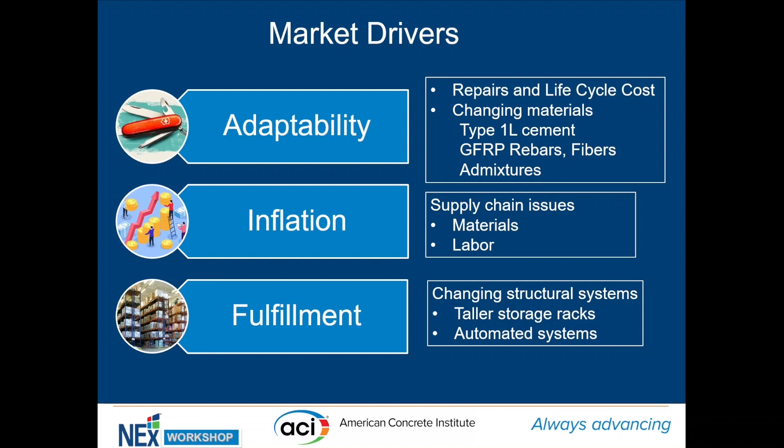Geotechnical concerns - we've got soils that will sometimes heave. Just all sorts of things happening right now. All right, let's take a breath. Think about what ACI 360 has to offer.

It's mainly 4 types of slabs that we address. Think of a plain vanilla 6-inch thick slab, no reinforcement, saw cut joints. It's generally going to be happy until we start putting loads across the joints. It's hard to break a slab except at the joints, at least in my experience.

Another one talked about in ACI 360 is slabs that are lightly reinforced, call it 0.1%. We talk about that in the document, but we don't talk about it enough - there's going to be a whole new chapter on that coming up. Another way to approach it is to extend the joints to where we call it a jointless floor slab.

And really load that one up with about 0.5% steel or more, that's a lot of rebar, very costly.

A third way to approach it is to take a more proactive approach. I think shrinkage compensating concrete has come a long way, it's really viable these days, a great option to be proposing to actively try to control shrinkage. Post-tensioning would be another good way, where we introduce a compressive stress before the slab ever gets loaded.

And then the hot topic, oh boy, I'm just the messenger here folks. Number 4: there's a lot of discussion in ACI 360 and various circles across the country about what constitutes a structural slab-on-ground. The really smart people in the group are still debating that right now - if we put a new mezzanine on it, or people on a platform or storage rack up there, to me that is a structure, and if it's sitting on the slab, personally I think the slab should be checked for factored loads. But there is some debate and some gray areas there.

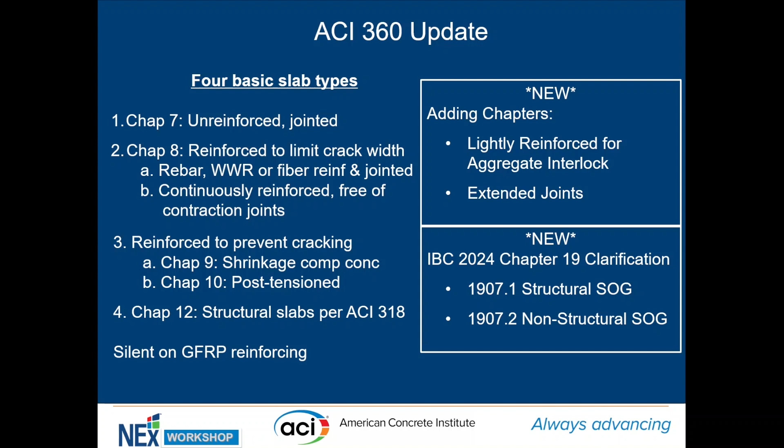The other one that we'll do a little bit more on is extended joints. Right now the sweet spot is either jointing the slab regularly at about 12, 15, 16 feet on center, or going jointless. There's a portion of the market that would like to see intermediate joints, and we're trying to address that in the document.

All right, here's the flow down - here's where we start. Typically you start with IBC, that flows down to ASCE 7 and ACI 318. Those are the golden books, right? Everybody's going to follow that. The reminder here is that ACI 302 and 360 are recommendations - those are guide documents. I can't just refer to them as code. If I want something in my contract documents that's in those two, I have to pull it out and put it in my specs or drawings so that it's enforceable.

Also keep in mind that 302 is a construction-related document, 360 is a design-related document. They go hand in hand. I suggest folks have both of them in their library. The third one I have here is TR34 out of Europe - it's a European-based recommendation document and has lots of good examples on how things are done in the European market and other places. I think it's a terrific document as well to have in your library.

Okay, so 5 things, just 5 things out of a 2-day seminar. True story - last night, after the session, another fellow comes running up to me: 'Jim, I've got a heaving slab.' Well, what happened? There was a rain event sometime before the slab was placed, and the soil was known to be prone to shrink and swell.

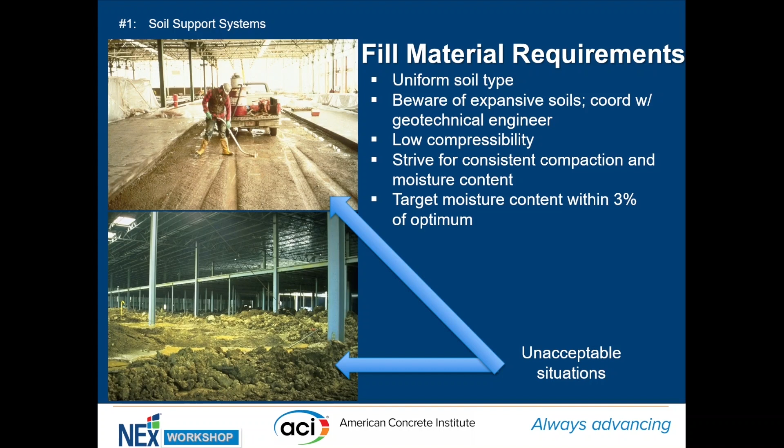We want to be within about 3% of the optimum moisture density. And here's what we want - I showed you the bad, it looks sort of like a gunslinger movie, now let me show you the good. Typically speaking, we'd love to see a road-based material that's about 4 inches thick, compactable, trimmable, not beach sand - it won't rut or pump with a fully loaded mixer truck or dump truck.

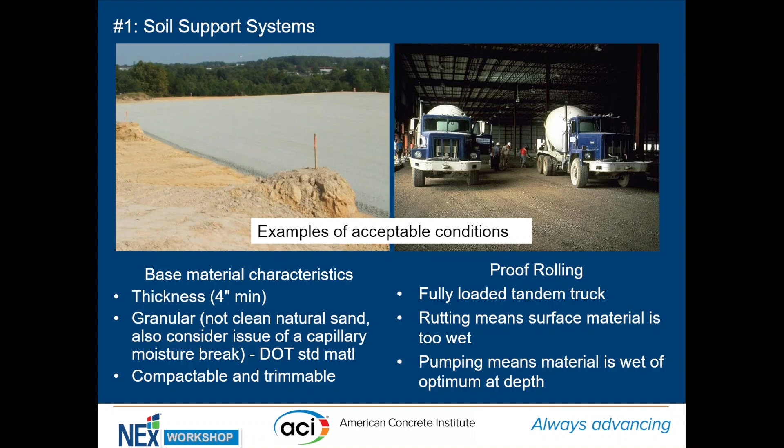Here again, this plays out regardless of whether it's GFRP bars, fiber slabs, or unreinforced slabs - trimmable and compactable, something we can work with. Here's why that's important.

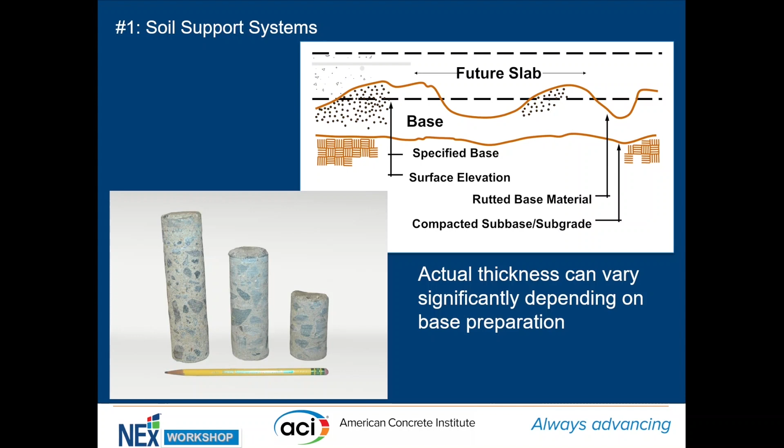We would hope for a little bit better than that. Some of that is contributed to the subbase and base preparation. The good news is that most contractors now have access to laser-guided vehicles so they can trim the base. I'm showing extreme examples, but we want to be really careful about setting up the ground.

Number 2, mix design. We were just talking about that earlier today. I've already met a number of people walking around the halls. I was on the elevator this morning, and this lady coming down with me saw my brochure and asked, are you with ACI?

Yeah, I'm with ACI, I'm out of St. Paul, I said, well nice to meet you. She was definitely into the material science part of it, so we had a lot to talk about, and she rode all the way down with me. She was going to the gym, but she said no, I'm going to go to the lobby and talk with you about aggregates. I want to know what you think about mix design.

So I basically went through my slide with her, thinking about packing as much coarse aggregate, middle-size aggregate, and fine aggregate into a volume of mix as we possibly can to minimize the paste. Why do we minimize the paste? Because typically the paste is what contributes the most to shrinkage and ultimately to cracking.

So if we can optimize the mix design with a workable water-cement ratio, normally around 0.5 — maybe some of you will debate that — but sometimes I see mix designs that are 0.35, 0.4, 0.45 without an apparent reason. Well, what does that do? It just forces the ready mixer to put more cement in.

So if we can go with something that's reasonable and get a good placeable, pumpable, finishable slab, then 9 times out of 10, if we do our other homework — put our joints in, know our loads — we're in good shape. Keep in mind it takes about 2 seasons, or 2 cycles, for most of the shrinkage to come out of a floor slab.

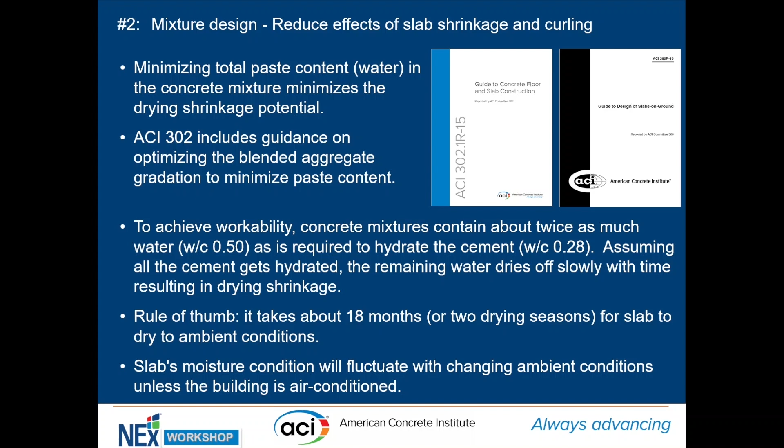Here's what that might look like. Last night I was talking with somebody about slivered aggregates versus round or angular. All of those things come into play, and that's where our friends in the ready-mix industry can tell us a lot.

That's one of the first calls I make. When I have a new project, whether it's in St. Paul, Atlanta, Irvine California, wherever it might be, I need to find out who are the professionals actually working with that mix design every day. Some of you may work in local markets, but my practice is nationwide, and I need to be communicating with the contractors and ready mixers as quickly as possible.

I don't always have this option, at least in my practice — folks want to get on the slab quickly. I've only had 1 or 2 projects in the years I've been designing where I could keep loads off the slab until 56 and 90 days.

But keep in mind that if we're using particularly higher dosages of slag or fly ash, we may not hit our 28-day strength, our F'c value, until 60 or 90 days. We did some predictions ahead of time on a big 5-foot thick wall we were designing, with 50% fly ash, and it hit the F'c value exactly at 90 days.

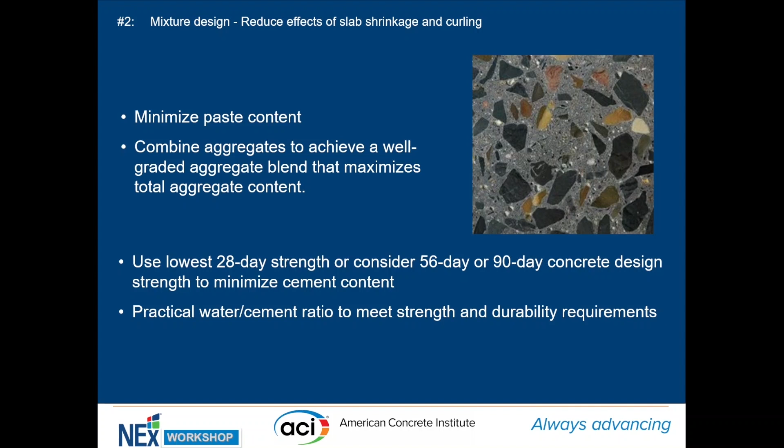I was really happy about that. And we had the luxury of not having to load that structure up until later on because some other things had to get built first. But just keep that in mind.

Okay, I'm talking really fast, so I'm going to slow down. You're good, you're good, doing good? You have plenty of time. Oh, I know I have plenty of time, I'm not sure I have plenty of material. So we can kind of take our time a little bit.

As designers, as practitioners, as contractors, what does ACI 302 and 360 have to offer? Regardless of whether it has GFRP bars or not, I'm suggesting that we study the graphs and the tools that are available. Show of hands, has anybody used these charts before? Don't be shy. Okay, so we got a good showing. Some have, some haven't.

But the take-home message here is that there are tools available. If you call your local ready mixer and get the submittal for how much cement, the gradation for the aggregates, you can run your own spreadsheet. I've got mine, maybe you all do too. Yeah, we can run those fairly rapidly, within just 30 minutes after you receive the submittal. You can type all the information in and plot these charts out, and look at the haystack curve or the tarantula curve, and decide for yourselves, should we try to change the blend, or is it good enough with what we have in a local market? Here again, Jerry Holland is quick to say, Jim, you get what you get, don't pitch a fit. So in Atlanta, Georgia, you're going to get granite, and up by me in Virginia, you're going to get limestone.

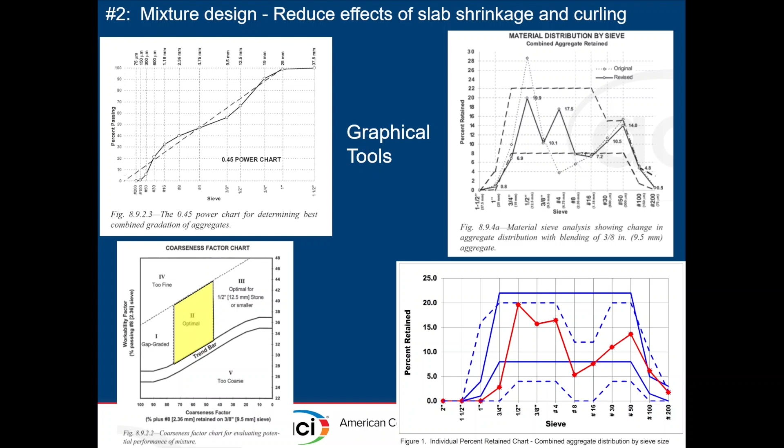Okay, fibers. We were talking about fibers earlier today. In pavements, the macro-synthetic are popular. In my experience, I've used both the macro and the steel fibers, not so much the micro. Those can be blended together, and I think there's no reason they couldn't be used in combination with GFRP. It's another consideration, another cost factor. But those are fairly mature in the market. They enhance various properties, and we've used them in conjunction with rebar over the years.

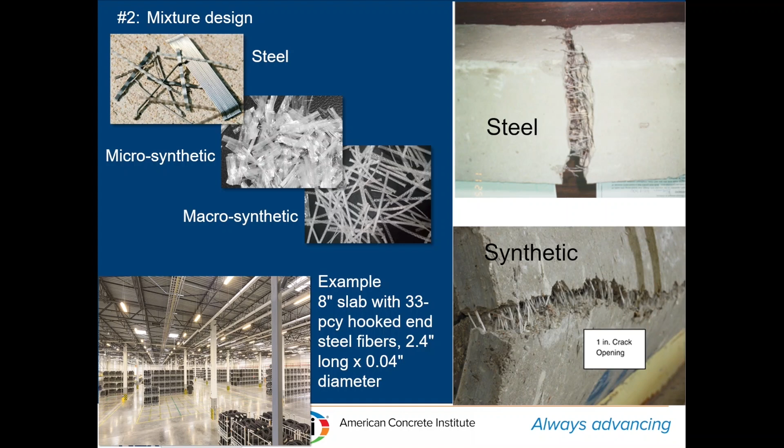We've gotten into a lot of unusual situations. For example, I was designing an industrial dryer many years ago where we put in silica fume and steel fibers and reinforcing in early age concrete, because we wanted to come back after an offline situation very quickly. So you may find yourself in cases where you need to combine various materials. Just one example, not to promote one type of fiber or another, but we can deliver beautiful, long-lasting, durable floors with these types of fibers. This particular example is 8 inches thick with 33 pounds per cubic yard of hook fibers. In my experience, somewhere between 30 and 60 pounds per cubic yard of steel fibers is what I typically have seen, and with the macro fibers, maybe 1 or 2 pounds per cubic yard would be our target.

Okay, here's another funny one we were talking about just this morning. Here's a joint layout. This particular one is a perfect condition of a rectangular footprint on the building, and we're going to cut joints and tell that slab, I want you to crack right here at these different locations. If I've got lift truck traffic, I'm going to provide some sort of stability probably across the joints there. But the problem is, at least in my experience, I'll have an elevator over here, a ramp here, a loading dock up there, and suddenly my slab will be chopped up. And so I spend a lot of time thinking about the joint layout.

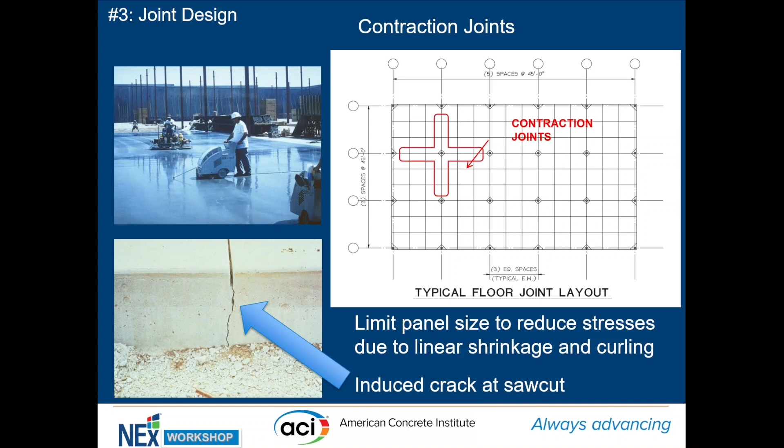And I have some colleagues that just sort of leave it up to the contractor. We were just talking about that this morning, that if you leave it to the end, and it's 90 degrees out there on a Friday, and they're getting ready to cut the joints, what are you going to get? But if you plan ahead with your best ideas of how to do the joints, you're going to get what you asked for rather than the opposite. Does that make sense? So I'm suggesting to go ahead and plan the joints. Joint stability, in my view, may be the number one thing that we deal with right now. Let that settle in for a minute. That's debatable, but it's got to be in the top 5. Joint stability, I see a lot of heads nodding.

How do we reinforce the joints? We can run rebar through the joints continuously, or we can put dowels. I didn't show the round dowels. The plate dowels are popular in the industry, both at saw cut joints and at construction joints.

The warning we talked about just this morning is that the dowels do need to have adequate cover. Got to be careful about that. We don't want the dowel baskets to be displaced during the concrete placement. The rebars, whether GFRP or steel bars, typically don't have that negative influence. We just have to be careful if we're going to use dowel baskets that they remain in place during the placement of the concrete.

The message here is that there is some guidance in ACI 360 about the spacing. The dowel manufacturers can help with the size and spacing depending on the loads that you have.

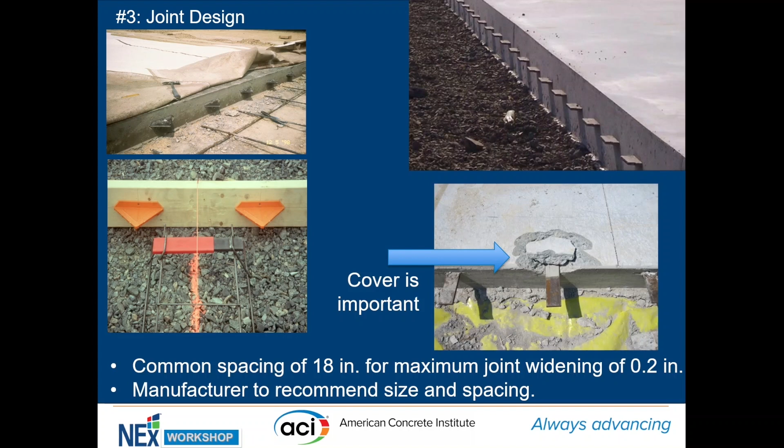Now this is one of my favorite charts, I use this one quite a bit. On the left-hand side, it's an easy-peasy chart. We have on the x-axis the slab thickness, the joint distances are on the y-axis. So then we have different levers that we can use to control what's happening with our slab.

If we feel like we've got a slab that's going to shrink a good bit, that's got a higher shrinkage potential, we can dial down the joint distance. So for example, if we had an 8-inch thick slab, if we think we've got just typical concrete, what does that come out to be? About 16, 17, 18 feet on center. If we're high shrinkage potential, then we may back it off to about 15 feet on center.

The balance is the more joints we put in, the more maintenance we have on those. So you have to think for yourself as to what you believe to be a reasonable joint spacing for whatever shrinkage you think you may have. And hopefully the concrete supplier or contractor can provide shrinkage results testing to tell us whether it's going to be what we would consider low, medium, or high shrinkage.

For most of my projects, I don't typically have the testing up front because I work in a design bid build atmosphere typically where the contractor isn't known until after the drawings go out. And I'll typically assume a typical concrete. I'll usually use the green line for my layouts. I think that's fairly reasonable. And if you do all the other things, all the other detailing, the reinforcing, the dowels, the curing, then you'll typically be in good shape.

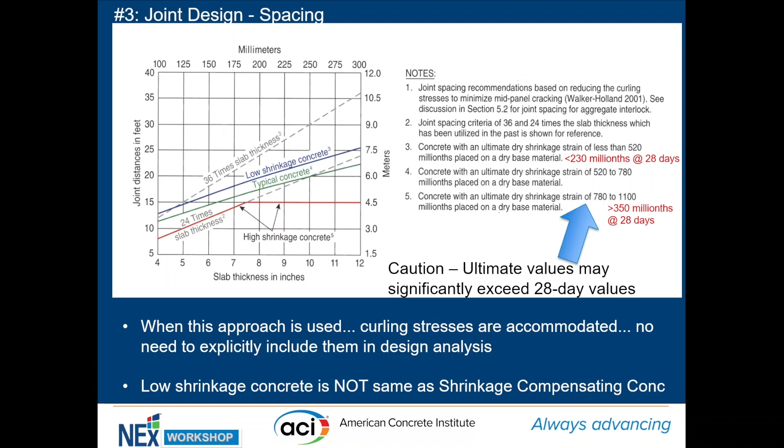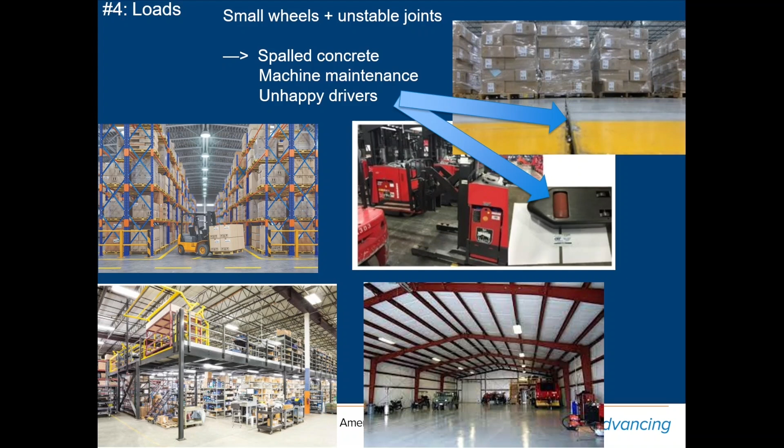The other one to keep in mind, we have taller and taller storage racks. It's important to couple or connect the two middle columns so that we get a much larger lever on, right, for overturning, and try to minimize the amount of uplift there. Another consideration is when we have uplift and the slab is actually in tension - oh, that seems like a structural consideration - that here again, we're debating that in committee right now.

Okay, number 5. This is the last big thing to consider. We're still doing good on time, plenty of time, and it's the last one. I promised Richie to give an overview of historic approaches to thickness design. I put this at the last on purpose. You know why? I put it last because if you've done all these other things, you know your loads, your soils, your curing plan, you know you're going to put dowels, it'll typically take about an hour or less to come up with a thickness. That should be, in my view, one of the quickest things that goes.

The reason I say that is there's so much literature available. In ACI 302 and 360, there's a number of graphs and nomographs. If you know your loads, your K value, your F prime C value, and what factor of safety you want to use, then it falls out pretty quickly.

Westergaard. It all started with him in the 1920s and 40s. Elastic-based theory. Think of your bed springs at home. You're laying on your bed, and there's springs down below. That's how we're modeling the soil. It's actually a continuum, we all know that, but we're going to model it using springs, and most of the time that works pretty good.

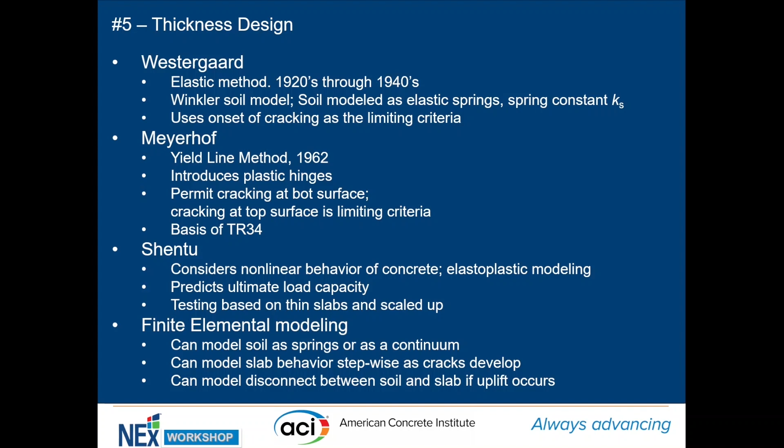And then the last thing is finite element modeling. I've done my fair share of finite element modeling. Its power is that once you get the model built, you can run a whole bunch of different scenarios rapidly. It's all about the assumptions, the boundary conditions, and getting those right and feeling comfortable with that in order to have a reasonable result.

Picture worth 1,000 words. We talked about bed springs, right? The concept is that the springs are decoupled. They're not working together, they're not a continuum like we know the soil really is. But in a lot of cases, it gives a reasonably conservative result that is within some range of what you could do with Westergaard or Meyerhof and some of the others. You can sharpen the pencil and go on from there, but this is a pretty good place to start. And here again, there's a whole bunch of guides within ACI 360, tables, nomographs, that can help you get to a thickness fairly quickly.

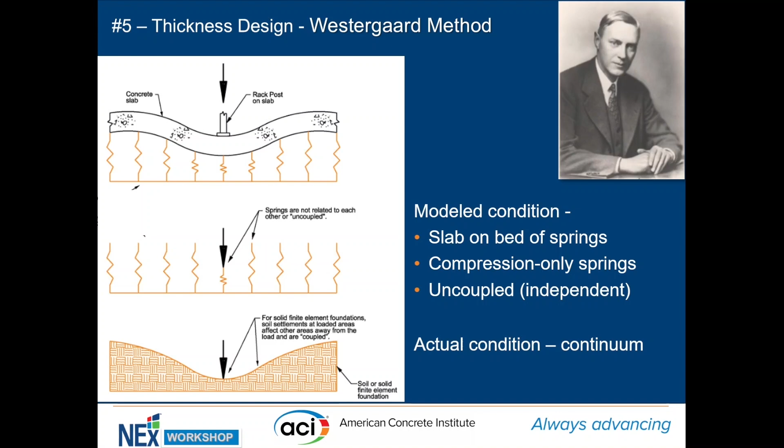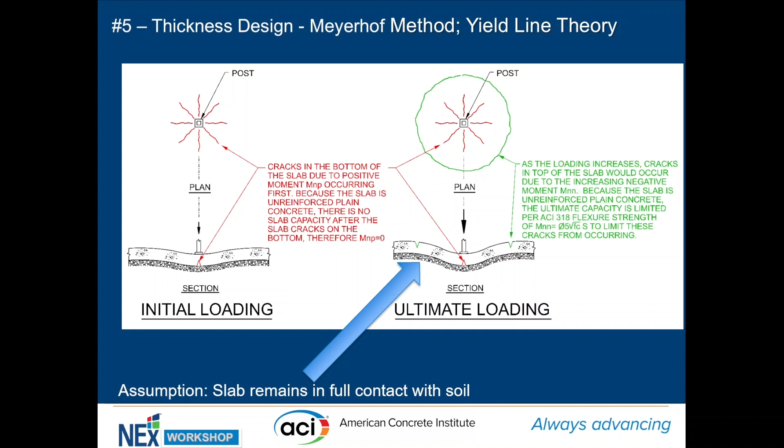All right, our friend Meyerhof. He comes online in the 1960s. We're letting the slab crack at the bottom, and we're going to radiate the cracks up to the top. We get a circular crack at the top. Now here's where the reinforcing and the fibers really come into play. If we have the right amount of reinforcing, the right amount of fibers, then Meyerhof's approach makes a lot of sense. Let that soak in for just a minute. Over on the green part is where I'm suggesting that we back it off by some safety factor or some means to keep it from cracking at the top. We don't want to crack here at the top.

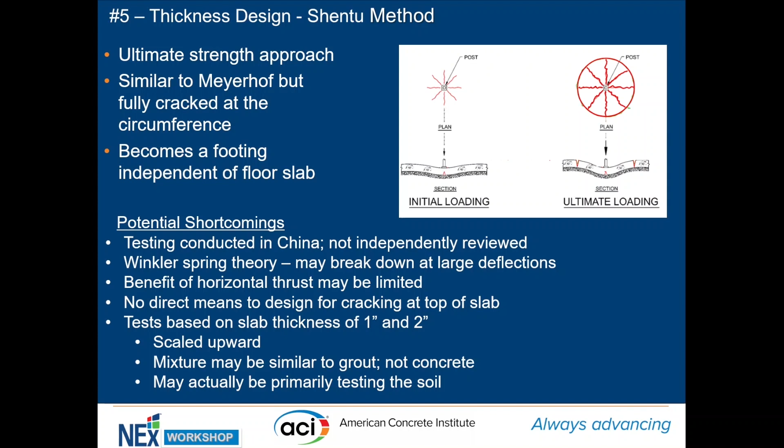For the Shentu method, I'm cautioning that it's been published in an older version of maybe Concrete Construction Magazine. For the same types of concentrated loads, it's going to show a very high ultimate strength, whereas Meyerhof might give you 10 kips, this might show 30 or 40 kips of capacity. In order to achieve that, we're going to have fairly large displacements. There's nothing wrong with research done overseas, but I don't think it was vetted by university professors or folks really in the know. It was also based on 1 and 2 inch thick slab thicknesses, then scaled up for 6 inches and more. So I'm really just cautioning people about using the Shentu method.

Lastly, just to show a few pictures of what the finite element method looks like. I like it once we get it set up, and if our boundary conditions and material properties are correct and reasonable, then we can model a lot of things. We can model the soil as a continuum, and most of the time the depth of influence will only be 14 or 15 feet. We can model uplift, compression-only springs, nonlinear material behavior if you want to go that far. I've done it, but I wouldn't recommend it if you're doing this at home.

You don't want to go there unless you have to. If you've got complicated loads, stepwise loads, progressive collapse, whatever, I'm just throwing some things out, if you want to know more about the soil and how it's going to behave, it could be a good option. But it's probably going to take significantly more time to set the thing up and get comfortable with it. But once you do have the model...

Which software is this? Oh, right, the software is a good question. Thanks for asking that. The lady asked what software is available.

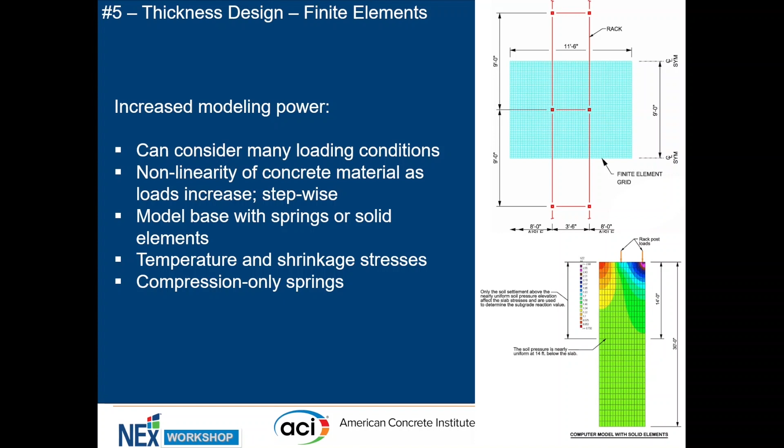I myself have used SAP a good bit, and it has the continuum or brick, 8-noded elements in it. SAP, ETABS, RISA, STAAD, I think most all of them have that these days. So I won't be a proponent of one or the other, but it depends on perhaps how you grew up. I grew up with STAAD, but then I learned SAP a few years ago as well, so those are my favorites. It seems like every engineer in our office has their favorites, and then I go to other Jacobs offices, and those people have their favorites. So it varies even within my company. That's a great question, thank you for that.

Tony, I think you're friends with Jerry Holland. You've got to be friends with Jerry Holland. Yes, I was 20-some-odd years old at Lockwood Greene many years ago, and I was designing beams, columns, slabs, braces for Jerry and Wayne.

I had nailed it down to the gnat's tail, ACI 318, AISC, my beams, my columns, everything was all set up. Well, the next day Jerry would have bumped it a little bit, not too much, not too conservative. I would say, Jerry, why are you bumping my design? Here I am, right out of college, I got a master's degree, I got the computer going, I got the finite elements, I got the daisy wheel printer, we're sharing one computer with 30 engineers in 1988. And he says, Jim, there's unknown unknowns. There are things that are going to happen. You've designed it to be strong enough, but have you designed it to be serviceable? I never forgot that.

This is the kind of thing where you might consider combinations of rebar and fibers and GFRP and silica fume, or fly ash, or what have you, to get to the best answer. That could be for a long-term owner. We're also seeing cases where an owner is only wanting a short-term solution these days. Remember adaptability, we talked about that, that it's possible somebody is willing to accept something only serviceable for 10 years, so long as we get that in writing. The cost is a big deal. And here again, in my opinion, the thickness design should take only an hour compared with everything else we talked about. I'm going to stop there.